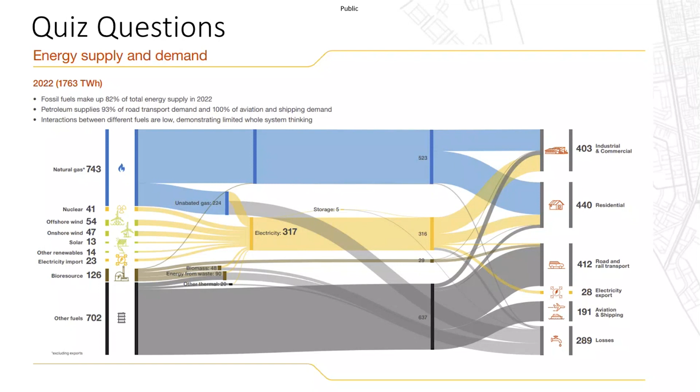And what's interesting is if we keep this figure of 317 terawatt hours in mind and move to one of the forecasts for 2050, we can see an increase of over 150% to 801 terawatt hours, which is a staggering increase in electricity usage, requiring significant transition over the years ahead.

Final one to finish, and it's $4 trillion. Now, this is the estimated global investment in clean energy by 2030 to meet our 2050 net zero targets. This is a great example of how the challenging transition actually provides opportunity as well, noting the expected job creation here. Further information can be found on the International Energy Agency's website.

So why have I selected these figures today as part of this webinar? Well, they go some way to explain the challenges and opportunities that the electricity sector is facing. Esri UK have developed the 7 C's to help summarise some of the challenges, and I'm glad to say it's nothing to do with cod liver oil.

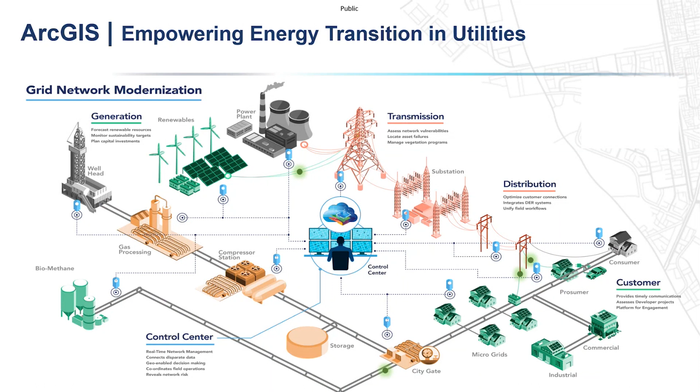We'll see a ramp up in IoT devices, helping consumers and system managers control usage effectively from a house level through to a national level. And to make all this happen effectively, efficiently, and safely, an innovative approach is required, along with central control through a whole system approach. And this is where geospatial thinking can help shape a new approach, drive change, and help recognise efficiencies. So how have Esri UK shaped a strategy to help the sector tackle these opportunities and challenges?

Well, in working with key contacts in the sector and with our customers, we have evolved this strategy wheel. The template has evolved through review of GIS and digitalisation strategies, and also brings in ideas and best practice from around the world. Cross-cutting themes, net zero, health and safety, innovation sit at its heart and apply to all sectors as we evolve out the next layer of segments. These 5 segments act as umbrella terms to focus on key areas of importance, which we can then break down around the wheel.

A geographic approach can help all these elements, and it's some of these that our demonstrations are going to explore today. I'll now pass over to Craig, Customer Success Manager at Esri UK, to introduce the first of our 5 demonstrations. Craig, over to you.

Thanks, Jonathan. So as Jonathan mentioned, we need to evolve our current energy network to support renewable energies moving towards the 2050 goal of achieving net zero carbon.

The first of these topics we're going to look at today is digital twins. How can a digital twin support a whole system approach? How can we start to look at our network and join the dots? Join the connections between generation, transmission, distribution, and consumption.

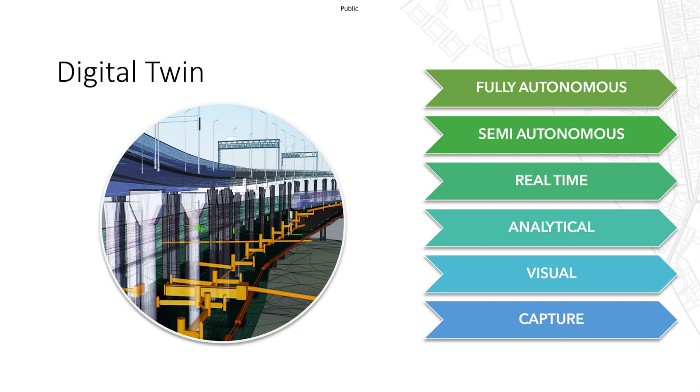When we consider the stages of digital twins, we can see how GIS aligns with them. The first stage is capture, which involves collecting and gathering relevant data. GIS excels in this aspect as it enables the collection of geospatial data from diverse sources such as satellite imagery, surveys, sensors, and more.

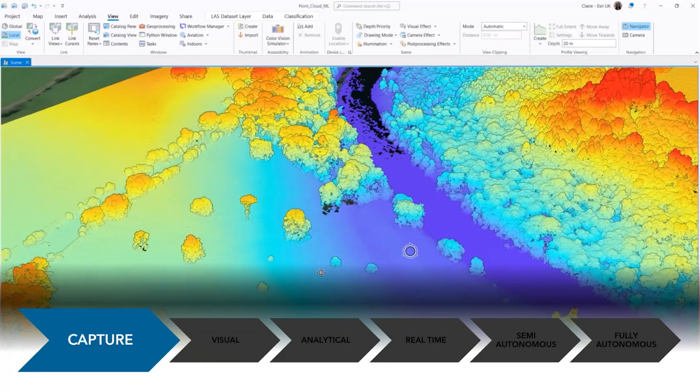The next stage is visualization, where the collected data is organized and presented in a meaningful way. Now, GIS allows us to create maps and charts and visual representations that provide context and help us understand the relationships between different elements of the real world.

So the analytical stage comes next, where spatial analysis techniques are applied to the data. GIS enables us to perform various analyses such as proximity analysis, network analysis, spatial clustering, and much more. And these analyses help us gain insights and discover patterns and make informed decisions based on the spatial relationships within the data.

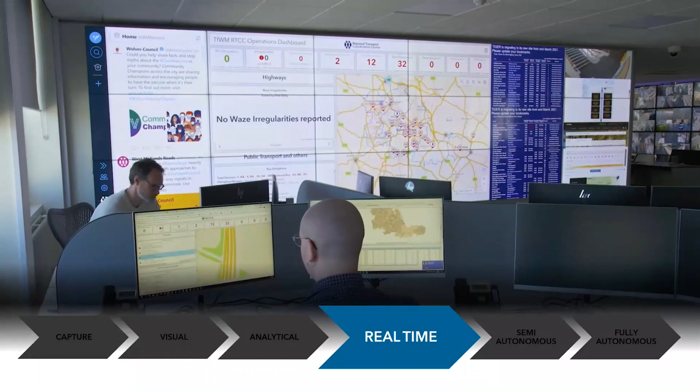Moving forward, the real-time stage involves integrating real-time data feeds into the digital twin model. Now, GIS platforms can incorporate live data streams such as weather information or traffic data or sensor data to provide an up-to-date and dynamic representation of the real world.

As we progress, the semi-autonomous stage emerges where artificial intelligence algorithms and machine learning techniques are applied to the digital twin. AI algorithms can analyze the real-time data, spot patterns and trends, make predictions, and even take actions to optimize or resolve situations. And this level of maturity empowers decision makers with intelligent insights and recommendations.

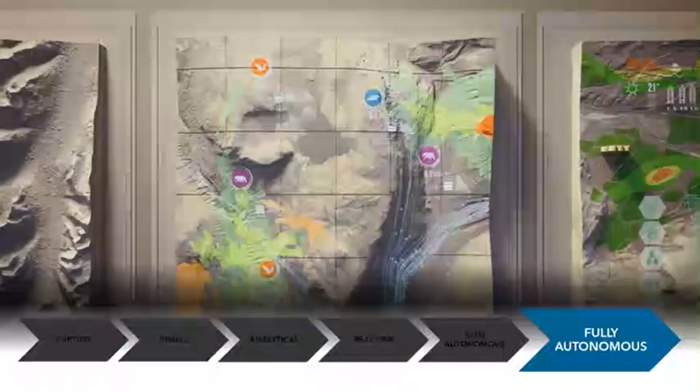And lastly, the fully autonomous stage represents the pinnacle of digital twin maturity. At this stage, the digital twin becomes a comprehensive and evolving model of the natural and built environment. It incorporates data from multiple sources, from agencies and systems, representing complex interactions between different elements. The fully autonomous digital twin learns, optimizes itself, and can make decisions independently, functioning as a living, breathing representation of our world.

Now, it's worth noting that the concept of digital twin can vary in meaning and scope across different sectors and industries. However, by understanding the stages of digital twins, we can appreciate how GIS has always been a form of digital twin in capturing, visualizing, analyzing, and integrating geospatial data to create a comprehensive understanding of our environment.

As a business and society, we aren't quite at the autonomous maturity level yet. But using location, our aspiration is to get to the stage where we can develop a picture report of the city, an interconnecting view of multiple digital twins, road networks, buildings, green spaces, something tangible that customers, stakeholders, and non-technical audiences can click on to see the current status of a project or a substation or planned works. The opportunities here are endless.

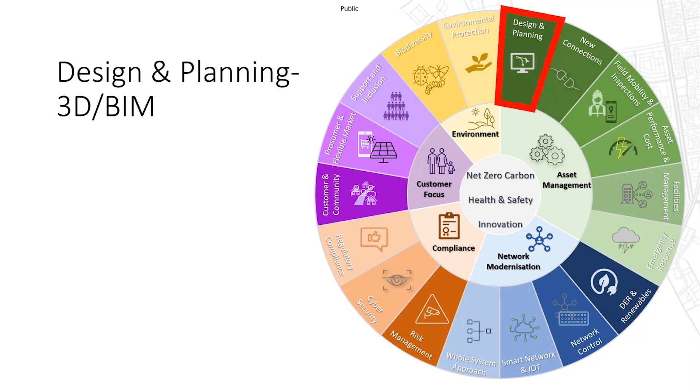This next section, Dan's going to go into a little bit more detail about how 3D and BIM can support the planning process and help make informed decisions going forward. Back to you, Dan. Thanks, Craig.

So let's have a look at what is BIM and where does GIS fit in. BIM, as Craig's mentioned, is short for Building Information Modeling, and this really focuses on capturing detailed information about built assets. It provides a digital representation of physical structures, capturing attributes such as geometry, materials, and performance data. BIM models contain rich and accurate information about individual building components, including the walls, floors, HVAC systems, electrical networks, and much more. This level of detail facilitates design, construction, and maintenance processes by enabling precise coordination, clash detection, and asset management throughout the building lifecycle.

On the other hand, GIS provides information about assets in a broader context of the built and natural environment. GIS integrates spatial data with attribute information, allowing users to visualize, analyze, and interpret data in a geographic context. It encompasses not only the built structures, but also the surrounding terrain, land use, transportation networks, natural resources, and environmental features. GIS enables users to understand how assets are interconnected with the surrounding environment, facilitating spatial analysis, decision-making, and planning.

When BIM and GIS are integrated, they create a really powerful synergy. By combining detailed building information from BIM with the spatial context provided by GIS, stakeholders can make more informed decisions and gain a deeper understanding of the built environment. This integration enables stakeholders to analyze the impact of building assets on the surrounding area, assess potential risks, and optimize resource allocation.

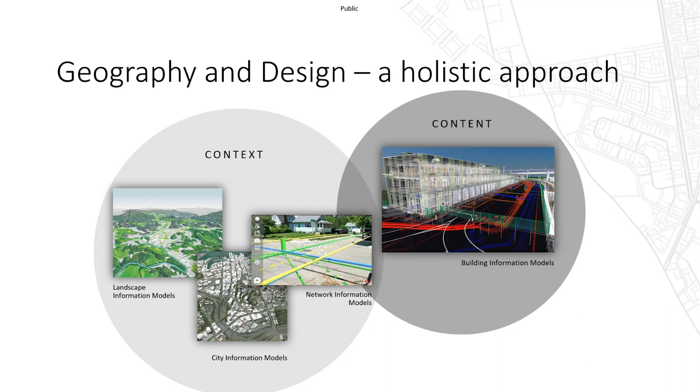As with any other application, you can restrict who has access to it, be that just a couple of colleagues, the wider group, your stakeholders, or even the general public.

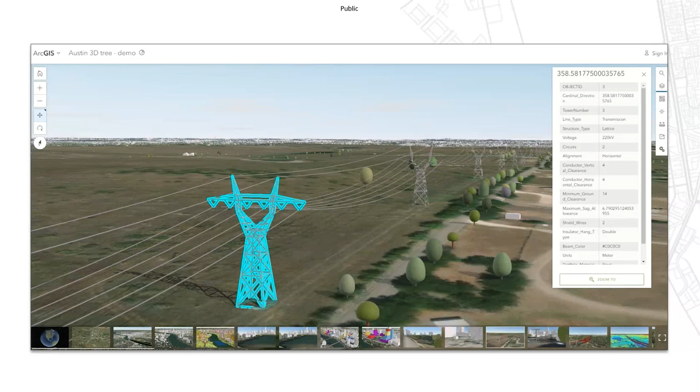So I can click on the model to see more information about it. We'll see that pop up on the right-hand side. And likewise, I can go ahead and click on a cable here and see more information about that too. And I can do this because I can publish BIM files out of ArcGIS Pro, our desktop software, into ArcGIS Online or Enterprise, and it will pick up all of this information within that model.

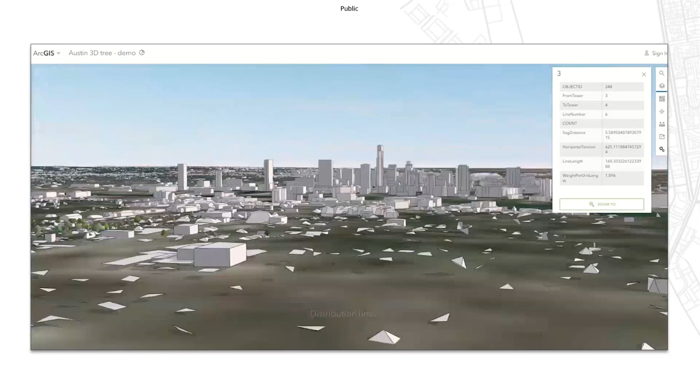So what I want to do is go and have a look at a distribution example. We'll be zooming out and moving to another part of the city in this web scene. And again, we can see the same thing happening. I can see the models in the context of the surrounding area, and I can access the information about them.

Now I've got one more web scene to show you, and in this one I want to highlight a couple of other features of a web scene. You can see this one's really similar to the last one. We've got buildings, trees, and base mapping. And again, we can choose some of these bookmarks to take us to a model.

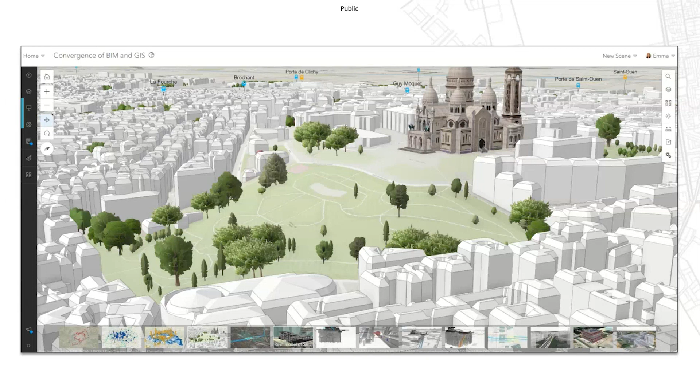And what we'll see is a really detailed model sat here with its contextual base mapping and surrounding buildings. From within the web scene, we can start to explore the building level by level, again clicking on assets for more information.

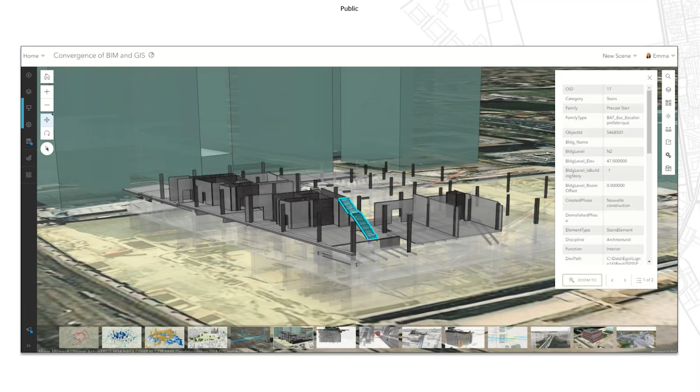The next example I'm going to show you is, again, a BIM model, but with a bit more detail, which we can, again, explore using the Building Explorer. This time we've got all of the mechanical assets here as well, which we can toggle on and off, for example. We can see things like pipework in this example, but this could equally be cables or any other elements of a BIM model.

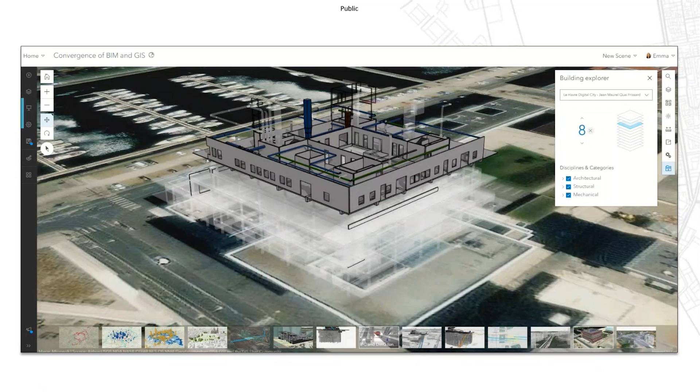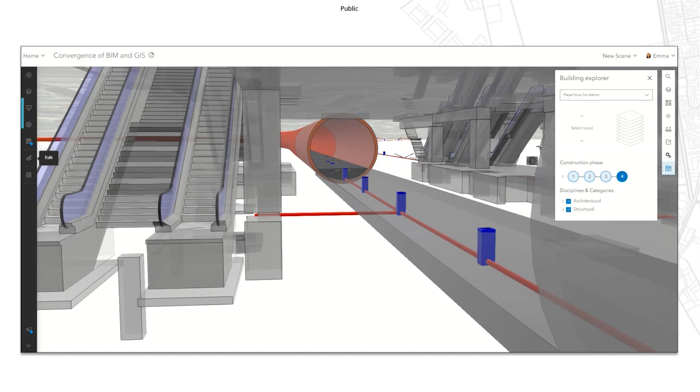Okay, that's all from me on BIM, so back to you, Craig. Brilliant, thank you for that, Dan.

So we've started to look at how to visualize your data, how to start building your digital twin. Now, next we're going to look at field mobility and how GIS information and your data can be disseminated across your user base, whether out in the field, in an online or offline capability, and how they can use this in certain scenarios, how they can bring in data and have access to things like weather data in the field, how they can use your data for things like site inspections, asset updates, looking at instances of damage, repair. Dan's going to show an example or a couple of examples here of how this can be undertaken.

Back to you, Dan. Thanks, Craig. So we've got a really wide range of mobile applications to cover really the whole life cycle of works. This could be from planning work all the way through to capturing simple or complex data, and then even potentially tracking and monitoring data collected or users in the field. You can see on the screen now a range of products which all answer a specific problem. And the one you're going to see most often is ArcGIS Field Maps, and that's what we'll focus on in this use case today.

So what is ArcGIS Field Maps? Well, it's designed to replace paper processes with an all-in-one solution for collecting data in the field. Maps are created for the app in a web browser and shared either to groups or the organization, which field operatives can then access. There's the ability to download an area of map and data to ensure that the operative still has access while working offline.

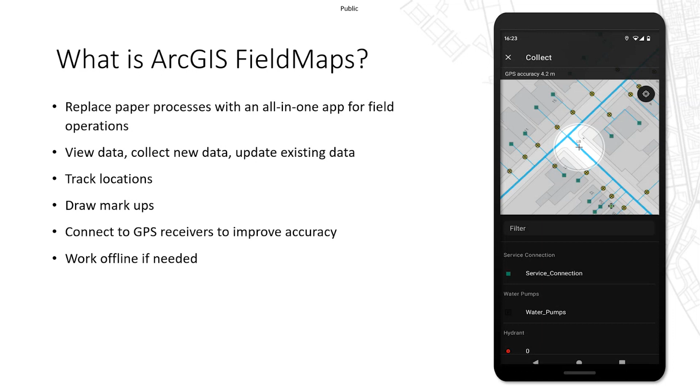Now, the map could include both network and non-network data, or pretty much any data that you've got in your ArcGIS Online or enterprise environment. This can be pushed out to Field Maps, and it can be set to read-only or editable. Some other features are the ability to track your location, so you could walk a route and it will capture that as data. We'll see that in a moment. You can increase the accuracy with high accuracy GNSS devices, as well as capturing data. You can capture something called markups, which could just be notes to self sort of thing, but are shareable with your organization.

Firstly, managers can see more information about me by clicking on my location. Equally, I can see that I need to review a fault report at this location, so I can click on it to see more information. But while I'm here, I also need to report any other issues I see with the site.

We can see in the app that I have a map with layers from the ArcGIS system within it, and I'm connected right now, so any changes I make will be reflected in the rest of the system right away. But I could equally download an offline copy of the map and layers and sync them back when I get connectivity.

I've turned on location sharing, which means my location is being recorded. As I move around the site, we'll see the blue line start to generate. This is great as a reference for me, but we could also convert this to a data layer if needed. This also means the manager back in the office can track my location, as we can see in the dashboard.

I've just used the markup function to drop a note as to where I've parked. We'll speed up and move further north up the road, and as I get closer to the site I'll get a warning pop up advising me that I'm about 200 meters away. This is enabled through a feature called geofencing, which is set up in the web builder for field maps in advance of deploying to a site. This allows us to generate warnings when entering or exiting defined zones.

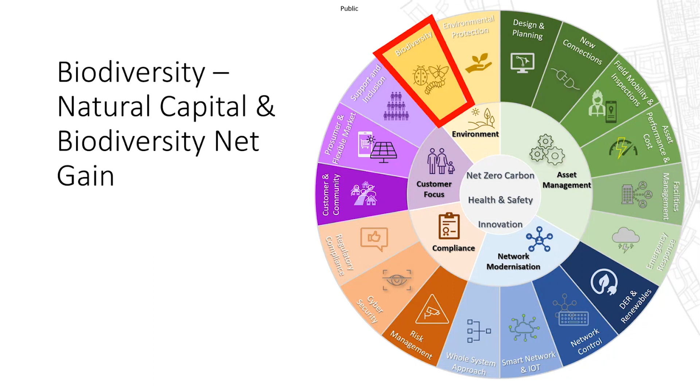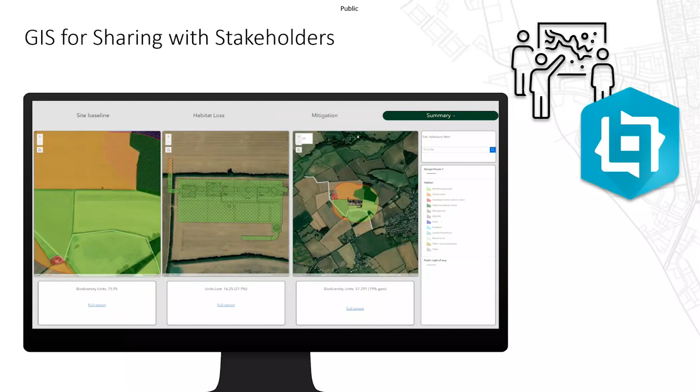And finally, we have a summary page where we can see each one side by side with their biodiversity units. And if we wanted to, we could also view this in 3D, so we can get a much more immersive experience, really bringing to life the proposals.

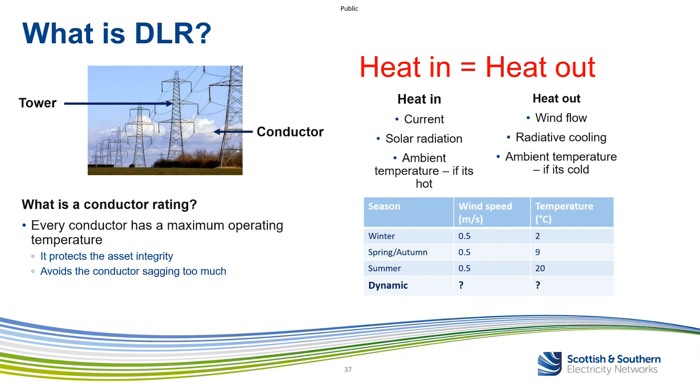When we first looked at the objective, we were met with a large geographic area and very limited data processing resource. In order to reach an initial conclusion in a suitable amount of time, a high-level approach was taken. Firstly, the circuit was segmented to differentiate its varying orientations, and more importantly, the angle of wind flow across the conductor. This was done by creating a new segment every time the orientation of the circuit changed more than 10 degrees. The focus then shifted to identifying and allocating sparsely located synoptic weather stations and calculating the line rating for each segment identified.

Further to this, the estimated generation in the area was also counted using the same weather data and a generic wind turbine power curve, coupled with the geographic location of the wind farms that are currently and planned to be connected to the grid. The result of this high-level evaluation is shown in the graph on the slide.

The dark blue line shows the predicted generation, the light blue line shows the estimated dynamic line rating, and the red line shows the static rating currently imposed upon that circuit. The graph shows from this high-level evaluation that DLR is feasible. The light blue line is higher than the dark blue line, and is worthwhile exploring further. It highlights correlation between the wind generation and dynamic line rating.

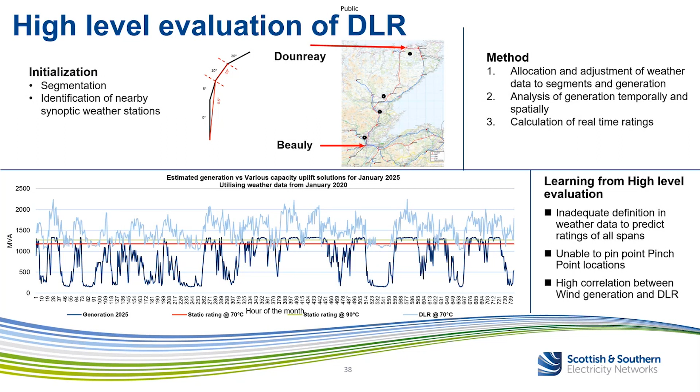This resulted in the development of a methodology with greater granularity to fill the gaps identified. Whilst developing the methodology of the desired granularity, a change of tact was taken. We'd been focused on using weather data in our analysis, something which is extremely variable across terrain and very changeable year on year. This, coupled with the sparse nature of synoptic weather stations in the north of Scotland, led us to focus on a terrain-based approach. The abundance of high-quality static topological data meant that highly granular analysis could be produced.

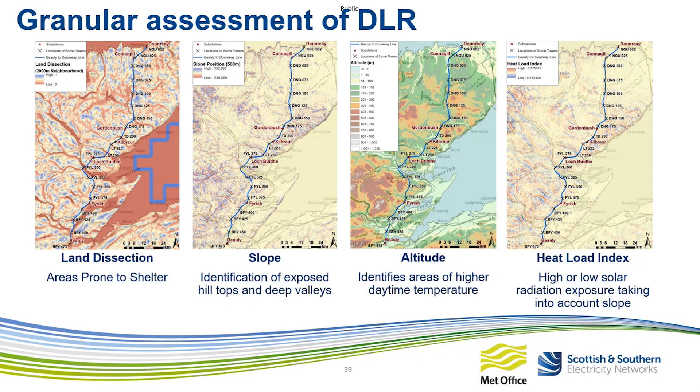The key differences between the two approaches are the ability to identify pinch points, and this is down to the line-specific data that can be produced. Interestingly, we can see greater disparity between dynamic line rating and the estimated generation in this approach. However, given the circuit is approximately 150 kilometers long, this is not unexpected and highlights that the more granular weather data is providing greater geographic separation. This methodology allowed us to produce accurate estimated uplift figures to provide to our system planning teams to determine dynamic line ratings value to our network.

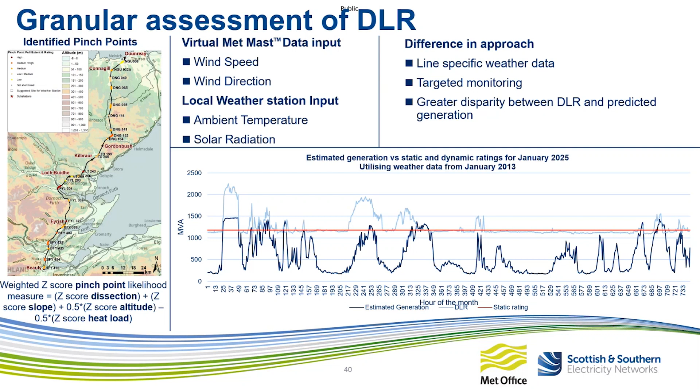Further studies have been identified to progress this methodology. Firstly, further research and development into the weighting of topological factors, and secondly, to enable the Beauly-to-Dounreay circuit, the one that was previously assessed, with DLR sensors in order to verify the estimation methodology.

In summary, looking at the initial problem statement, this study has demonstrated that DLR can provide increased capacity or decreasing constraint and allow us to provide system planning teams with accurate estimates, allowing them to correctly focus projects on strengthening and growing the network. DLR has a quick install time, and now a detailed but quick methodology has been developed, so the design process also allows for rapid rollout where required, helping to enable the net zero transition.

Finally, we have advanced our current techniques by developing this novel approach of utilizing topological factors to make an assessment of a weather-based problem, allowing us to inform our regulator and business and allowing them to make a decision centered around a realistic cost-benefit analysis. Thank you.